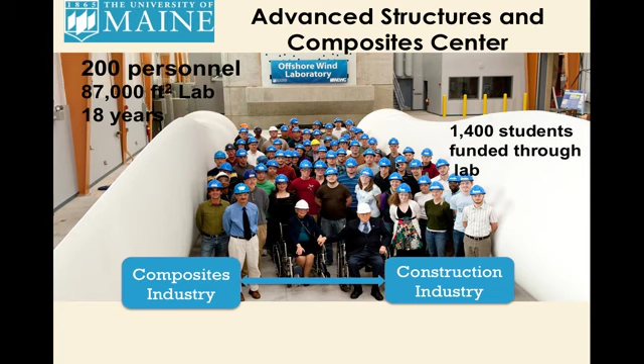We think it would be feasible to get to the cost of generation of electricity in our region. I'd like to remind you we have some of the highest electricity costs in North America in our region, so our ability to bring offshore wind down to meet those costs is our goal.

Our technology helps avoid some of the expensive offshore wind construction assets that don't exist in our New England region. We don't have the jack-up barges necessary to deploy offshore wind farms that Europe is deploying right now, nor the large, heavy cranes we'd need to place on these offshore barges. So we've been looking at ways to avoid that by going to floating technology.

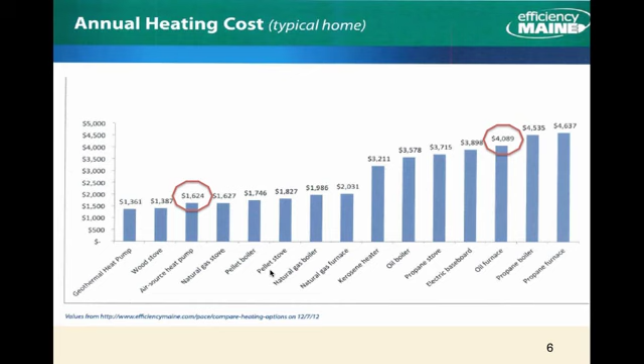We looked at 3 different types of floating wind turbine designs as part of our comprehensive effort of crawl before you walk, walk before you run. We designed 3 floating hulls for 5 megawatt turbines a number of years ago. These are 1:50 scale hulls placed in a wave wind basin, each subjected to 60 different Metocean conditions from the Gulf of Maine. The hulls were instrumented with sensors to measure overall global motions, and they had fully operational turbines on them—the same turbine on all 3 hulls.

We learned a lot from this experiment. What we learned is that all 3 designs are viable, and the choice of design and materials depends on where you'd like to build these. That's the key: we can make them all work, but the question is what works best for your particular region.

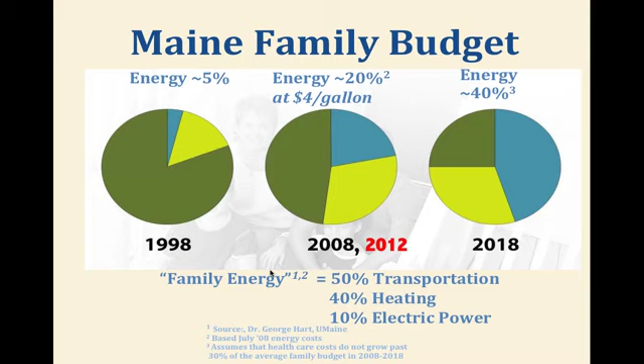Our VolturnUS paradigm shift is choosing to get away from using steel for these units and go to a concrete hull instead. The reason is the cost of steel in our region is very high, and fabricated steel is very high. We don't have large-scale steel fabrication facilities in our region that can compete with Southeast Asia prices. In the U.S., we've actually lost our steel hull boat building capabilities to Southeast Asia because of production costs here.

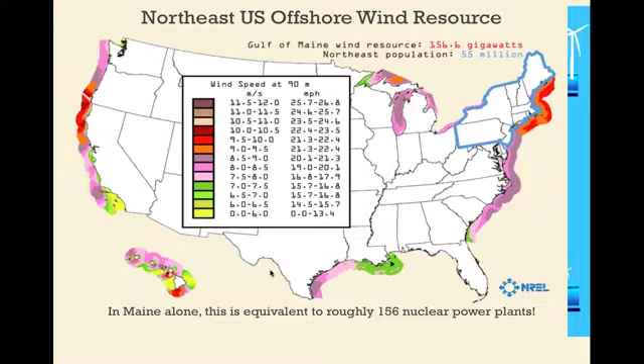It's a modularized approach for construction to drive the cost down, and it provides corrosion resistance opportunities too. By going to floating wind turbines, we can go farther offshore in the Gulf of Maine, where we've seen gross capacity factors exceeding 50% in the region we'd like to go, with average wind speeds around 9 meters per second at hub height. So floating technologies allow us to access a much better wind resource farther offshore.

We also use a composite tower on this unit to drive down cost and weight. A composite tower on a 6 megawatt unit allows us to cut the weight of the steel tower by a factor of 2, and then we can take out 2 to 3 times that weight reduction from the hull as well. So for every pound or kilogram of steel we take out from above the water, we can take out 2 to 3 kilograms of steel from below the water.

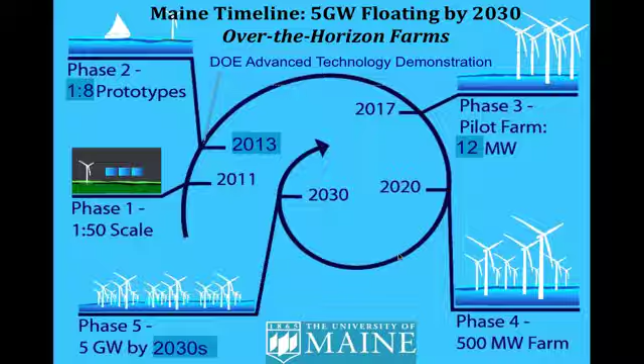We towed it down the Penobscot River for about 30 miles to its final location off Castine, Maine. The tow-out was one of our first experiments in this project, to prove that this particular design can be towed out efficiently. We had sensors measuring the forces in the tug line as well as the motions of the unit during the tow-out operation, and that was a successful operation.

One of the most important parts are the scaling studies we've conducted on this project. The question is how do you get the most out of a scaled experiment? That's not a very simple challenge. Can you really truly have a good scaled experiment? And when you're further offshore, can you truly characterize the environment accurately enough to verify the numerical models and verify the performance? These are major challenges we've taken on.

Our approach to scaling was to find a site that has 1:8 scale waves, and we did some wave modeling of the Gulf of Maine that identified a protected site off Castine, Maine. It's about 1,000 feet from shore and has a 1:8 scale wave environment.

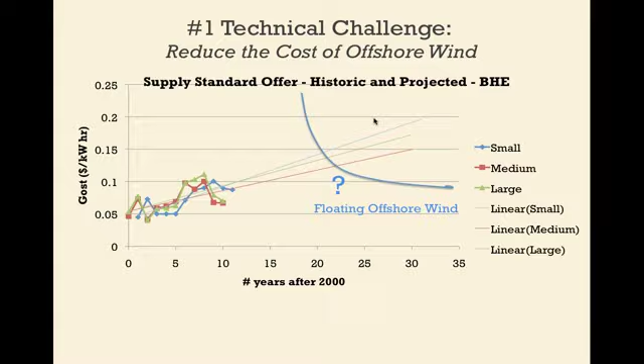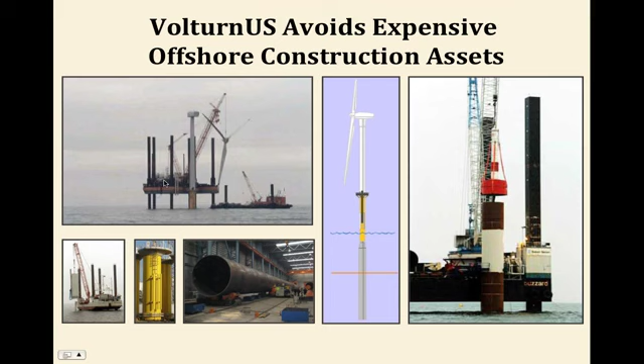Because it's a 1:8 scale, we're able to see significant events very quickly in terms of relative size of the waves to the size of the unit. We're able to see events in 100 to 500 year return periods in November, December, and January. So we've collected a lot of valuable data.

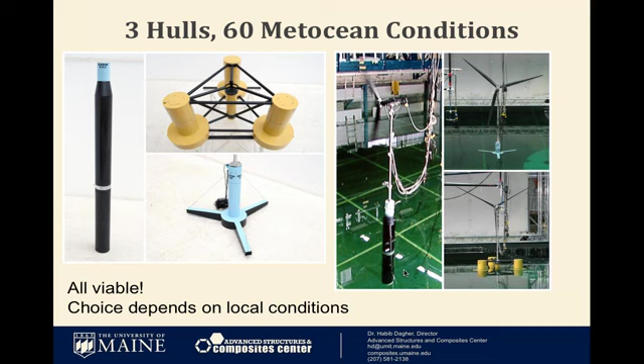One of these events occurred on November 1st at 1:59 p.m. I'm going to show you a video of that particular event. Another event I'll show you occurred on December 15th during a snowstorm. I'll show you those videos in just a minute.

I'm going to show you the videos quickly here, and then following that, show you some of the results we're looking at. This is the video that occurred.

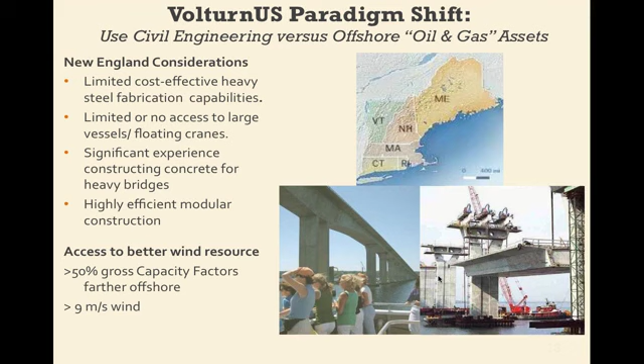The video will show you in just a minute some of the numbers in terms of wave height as well as wind speed. The wave height was about 8.8 feet here. You multiply that by 8, and that gets you almost 70 feet at full scale.

That corresponds to a return period of more than 100 years for the event. This compares the event we saw on November 1st to Hurricane Sandy, which had a 32.5-foot wave height, whereas the event we saw on November 1st had an equivalent 70-foot wave height. A 100-year wave height was 64.1 feet, and a 500-year wave height was 73.2 feet. So we're pleased that we were able to measure the performance of the unit during such extreme events.

During that event, the maximum acceleration we measured at the tower base was about 0.165 g, and the maximum angular acceleration was about 0.166 radian per second squared. The wind speed was about 41 miles per hour at the time, and the maximum inclination angle was 5.9 degrees. That's very close to what we had actually modeled, so it was very fulfilling to see that our models and the performance in extreme events were very close.

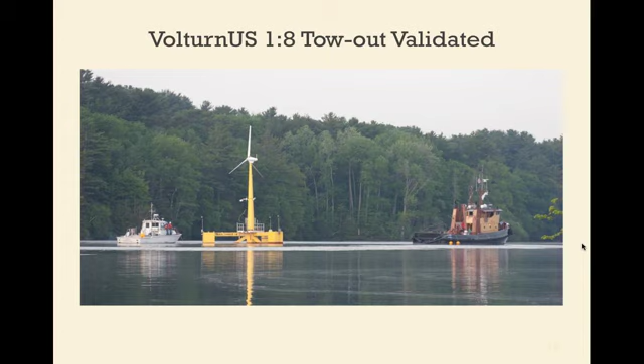Again, the November 1st event, very quickly - that event is equivalent to a 21.5 meter wave, which is between a 100 and a 500-year return period wave for the Gulf of Maine. During that event, the maximum inclination angle we saw on the unit was 5.9 degrees, and the maximum acceleration at the base was 0.165 Gs.

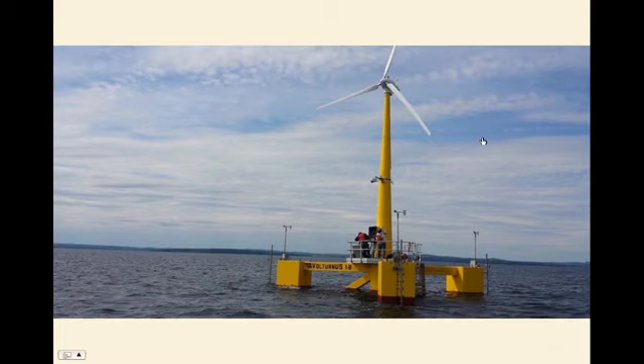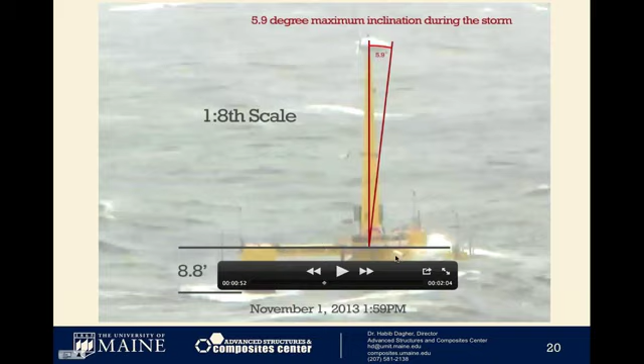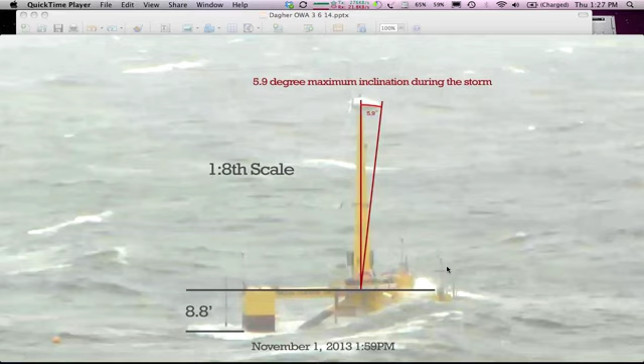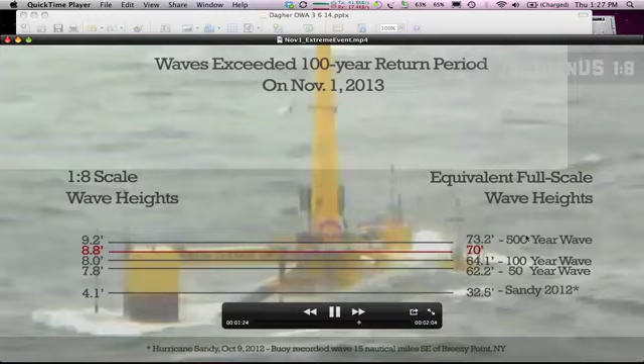So where do we go beyond that? Since we feel we have a successful 1-to-8 pilot scale deployment, and the technology has been proven out at least at the 1-to-8 scale, we're ready to go to full scale, which is part of the Advanced Technology Demonstration Program for offshore wind put out by the Department of Energy.

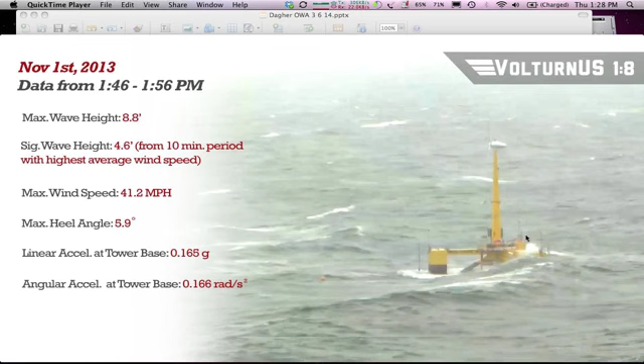The DOE will be selecting the winners of this competition, and we'll hear about that in May. If we are selected, we will be connecting our turbines to the grid in the summer of 2017. Our goal is to put in 2 full-size turbines using this VolturnUS design, where the hull is concrete and the tower is composite materials.

We have a power purchase agreement on the project, and we already have a lease for the site. The contractor that's going to build the project has been selected. The interconnection agreement has been tested, and there shouldn't be any issue to interconnect—we've done all the analysis for interconnection. The permits should be available to us by 2015, and you'll hear more about that from Jeff Thaler shortly.

Because we are in state waters, we follow a different permitting schedule than we would in federal waters—it's a state permitting methodology we need to follow. Our 20-year power purchase agreement was awarded to a private firm. We have formed an SPV, a special purpose vehicle company called Maine Aqua Ventus.

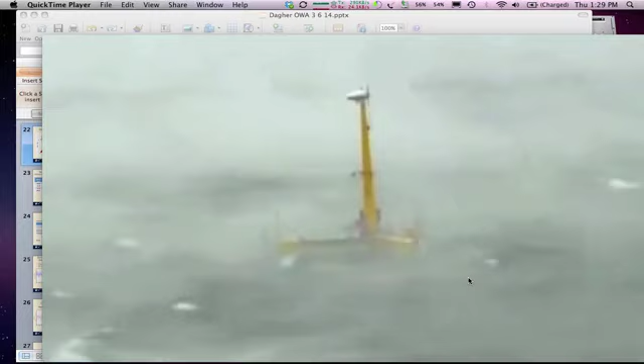That private company will be building and operating this farm. The private company has received a term sheet approval from the Maine PUC in January for a 23 cents a kilowatt hour project. Maine Aqua Ventus is made up of 3 main partners and 20 other partners that will come into it.

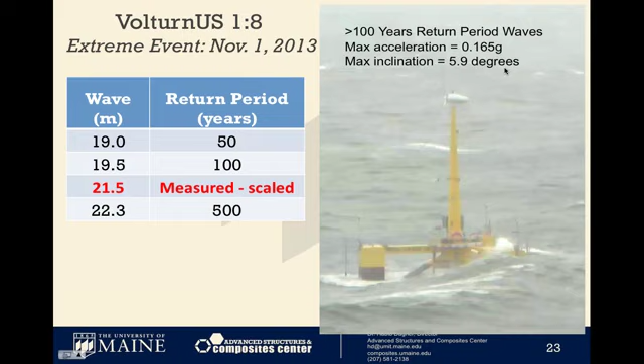The 3 main partners that manage the private firm are Cianbro, a company in Maine that's in 40 states in the U.S. with 4,000 employees; Emera, a leading developer and operator of electrical asset distribution; and Maine Prime Technologies, a spin-off from the University of Maine.

Collectively, they manage the new company Maine Aqua Ventus, a private firm that will build and operate this farm. The farm will be located off Monhegan Island, off the coast of Maine, about 12 miles from shore depending on where you land.

We've also done environmental baselining of the test site for over 4 years now, in terms of radar measurements of birds and bats. We've tagged fish at the site for the last 4 years and tracked their movements, and we've had bird ID studies as well. All that information, along with hundreds of community and stakeholder outreach meetings, was carried out between 2010 and 2014 and continues to be carried out. And with this, I'll hand this over to our attorney on the project, Jeff Thaler.

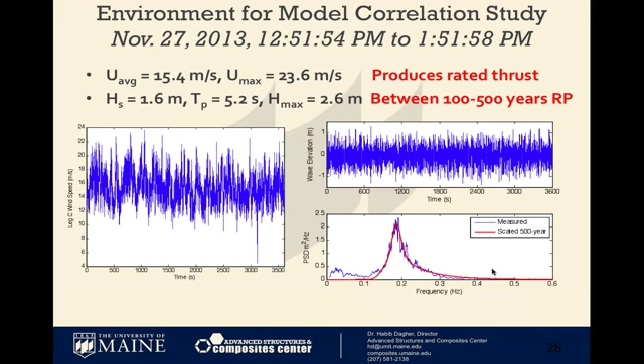We will also be getting a Section 10 Army Corps permit, which is required when you anchor to the bottom. So those will be the primary permits for the water deployment.

We'll be bringing the cable to shore and connecting to the grid, as Dr. Dagher said, so we'll have some local permitting. Our assembly site for the tower and turbine on shore will also require some permitting, but it should be fairly straightforward because of relatively minimal impacts, and because we'll be reusing sites that have already been developed.

Overall, on the permitting of the project, we'll be following in footsteps we've already carved out. One of the unique aspects of the project is being able to go so far offshore to capture the strength of the winds, as Dr. Dagher said, while still remaining in state waters.

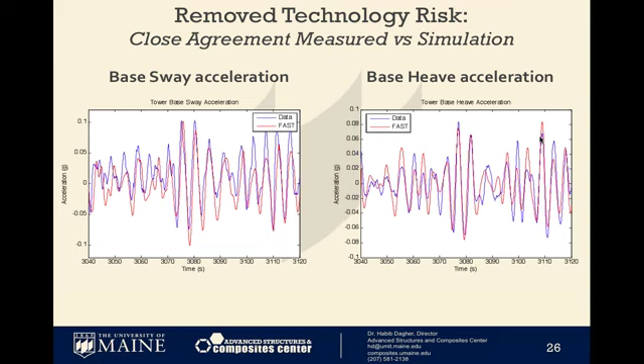That's in part because the Gulf of Maine and the coast of Maine have so many islands, and under federal law, if you're within 3 miles of a state island, you're in state waters. So with that, I don't have anything further on permitting.

Habib, I don't know if you had anything you wanted to say in conclusion. Yes, in conclusion, we believe we are on our way to obtaining all of our permits for the site. Again, we already have a lease for the site from the state, so the lease is in hand. The permits will all be available in 2015, and construction for the project will start at the end of 2015 and beginning of 2016, to be plugged into the grid, as we said, in the summer of 2017.

We're pleased that in Castine, Maine, in June of 2013, on June 13th at noon, the first offshore wind electron started to flow into the U.S. electricity grid, and they're still flowing today through this pilot project.

That pilot project gave us significant information that helps de-risk the DOE Advanced Technology Demonstration Program, which will be operational by 2017, and then tested for 5 years. Following that 5-year testing period, we would be in a position to start building commercial farms of floating offshore wind off the Gulf of Maine.

So thank you. This concludes the presentation for this effort. Happy to take some questions.

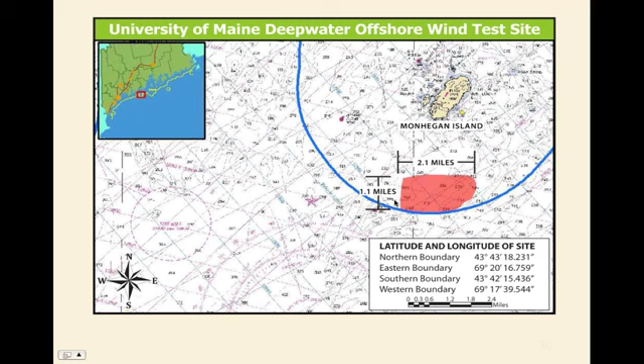The composite materials involve a lot of proprietary information, so I can't tell you everything about them, but the composite tower we used has been tested in our laboratory at near half scale under fatigue loading. We simulated the equivalent of 60 years of fatigue loading on that tower and tested it to failure afterwards, showing full residual strength. The materials and manufacturing methods we use for the tower are all available methods, so we try to keep it simple and not develop new methods that would be less reliable. We relied on existing resins, existing fiber systems, and existing manufacturing methods for the tower.

If the project is not selected by the Department of Energy for the next award, what are the future plans for the project? Would it continue without DOE funding? I would prefer to answer that question after we hear from the DOE in May.

Do you have any plans to deploy this technology outside of Maine? Yes, there's been significant interest in this technology, not only throughout the United States but also throughout the world on a lot of the major continents. We've had a number of requests to do some of these demonstration projects in other locations. We've been focusing our efforts on the DOE project over the last couple of months, but have been talking to a variety of interested groups across a number of continents and other states in the U.S. as well.

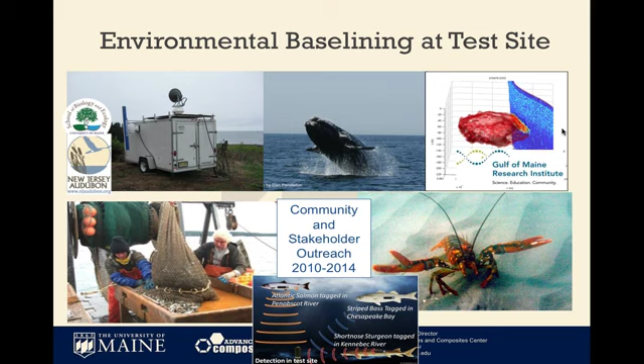Could you talk about the cost savings between composite fabrication and steel fabrication? What percentage of costs do you think? It's a function of the size of the turbine you end up using and the type of hull you end up using. The unit is made with both concrete and composite, so I'd assume the question relates to the composite part. In terms of the composite, roughly the weight of the tower, steel versus composite, when we go from steel to composite, is cut roughly by a factor of two—the weight of the tower is cut in half.

On a 6 megawatt turbine, the steel tower might weigh anywhere from 450 to 600 tons depending on how you design it. The composite tower would be about half of that, so if you have a 250 or 300 ton tower, you're saving about 250 to 300 tons of steel above the water. Below the water, you'd save an additional 2 to 3 times that amount depending on the size of the unit and the kind of hull. So with a steel hull, you'd save roughly 250 times 2.5 to 300 times 3—maybe another 600 plus tons. That's certainly very significant.

If you have a concrete hull, you have similar weight savings as well, depending on the size of the hull and the unit. Then the cost savings become an issue of how much your concrete tower costs versus composite versus steel, and how much weight reduction benefits the hull. Our numbers show that you do save money by going to a composite tower versus a steel tower for our concrete hull, and those savings also translate to a steel hull if you have one.